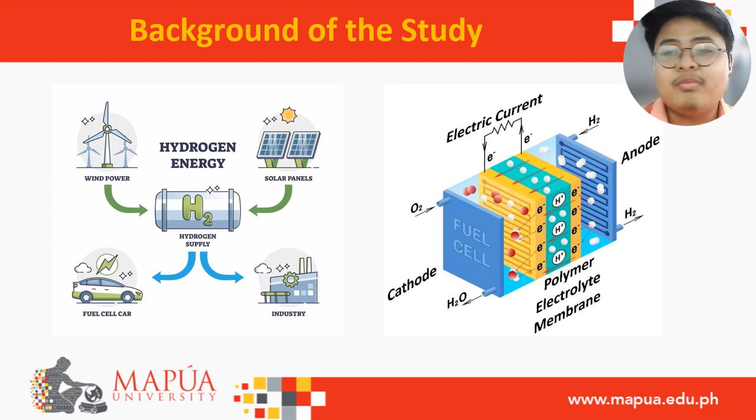It operates on the principle of having a redox reaction between oxygen and hydrogen to form water, heat, as well as electricity. At the heart of a PEMFC is the polymer electrolyte membrane or PEM. This membrane allows for the proper functioning of the whole fuel cell.

Studies have shown that there are different factors that could affect the performance of a PEMFC. This includes temperature, moisture, and microstructure. In this study, we will be focusing on the microstructure of the membrane and how it affects performance.

Furthermore, studies have determined ideal qualities for a PEM. This includes good ionic conductivity, the membrane being an electric insulator, it being impervious to gas, mechanically stable, and chemically stable. In this study, we'll be focusing on its ionic conductivity as well as how the membrane should be impervious to gas.

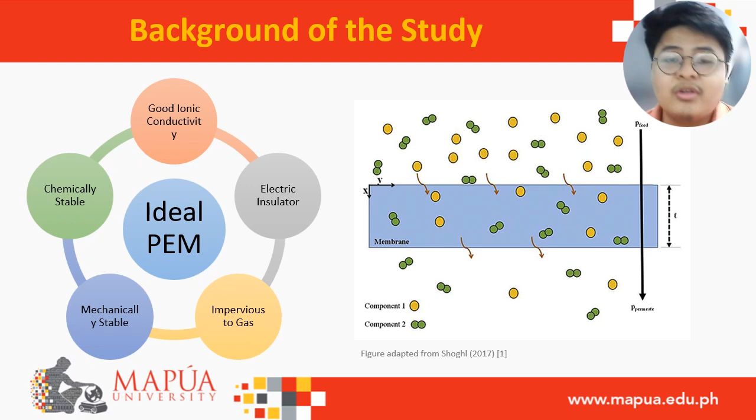Now, while the ideal PEM should be impervious to gas, in practice, gases do indeed penetrate through the membrane as shown in the figure on the right. We can see here that different components of gases are able to penetrate through the membrane.

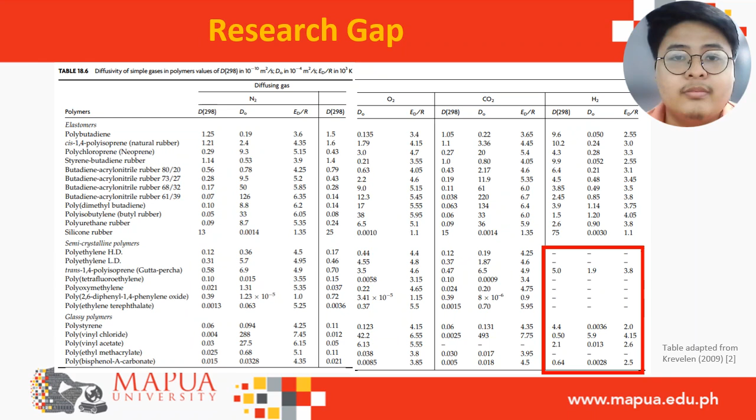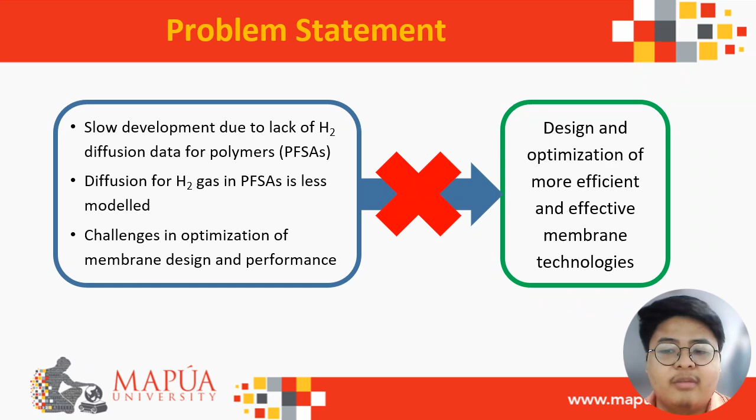The development of advanced membrane technologies is hindered by the scarcity of reliable diffusion data for polymers, particularly for gas-polymer interactions. This lack of information impedes the optimization of membrane design and performance, leading to inefficient and costly membrane development processes. To overcome these challenges, comprehensive diffusion data for polymers are needed to improve the understanding of gas diffusion in membranes, enabling the design and optimization of more efficient and effective membrane technologies.

To address these challenges, this study aimed to investigate the hydrogen penetration and diffusion into Flemion based on the penetration ratio of hydrogen in Flemion with varying side chain lengths via molecular dynamic simulations, as well as to decipher the mechanistic behavior of hydrogen gas into Flemion based on molecular interactions, also with varying Flemion polymer side chain length. Lastly, this study aimed to investigate the hydronium diffusion and conductivity in Flemion by varying Flemion polymer side chain lengths via molecular dynamic simulations.

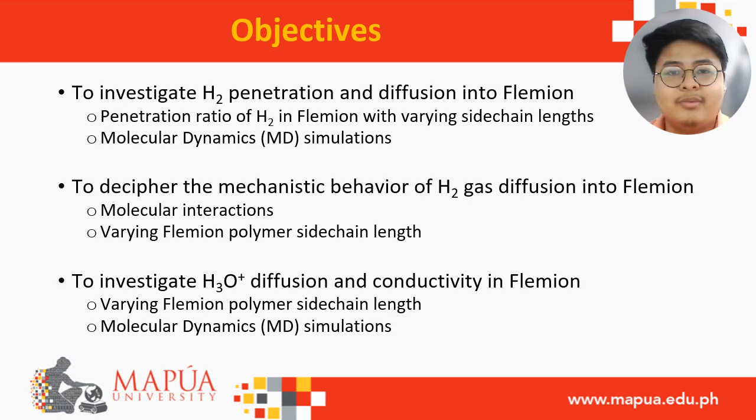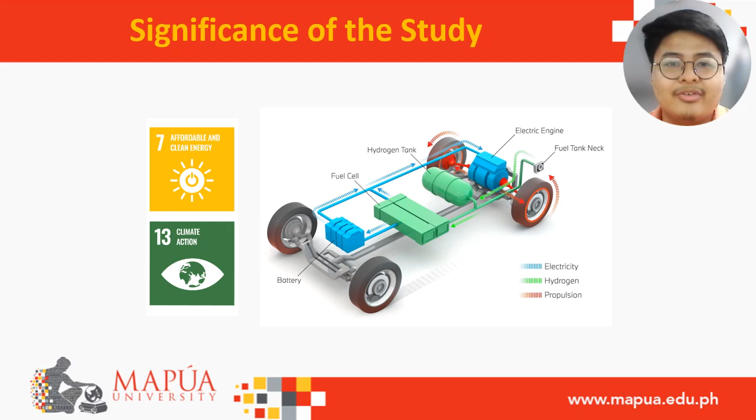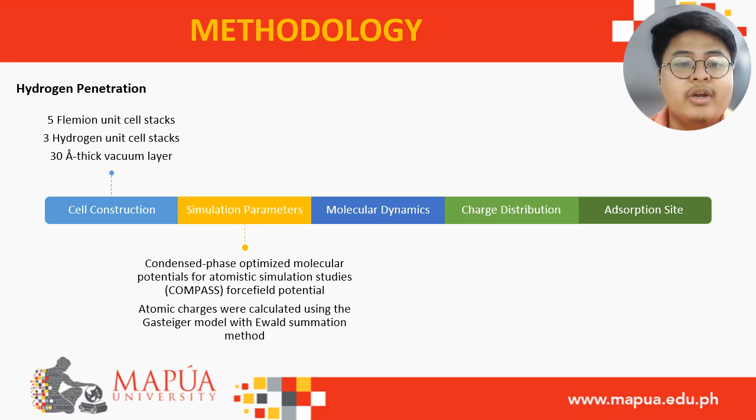For hydrogen penetration, this part of the methodology is based off of Chas' developed method on evaluating gas penetration into membranes using molecular dynamic simulations. For cell construction, our cell comprised 5 Flemion unit cell stacks, 3 hydrogen unit cell stacks, as well as a 30 angstrom thick vacuum layer. For the simulation parameters, we made use of a COMPASS force field potential, where the atomic charges were calculated using the Gasteiger model with the Ewald summation method.

For the molecular dynamics, we made use of a constant temperature molecular dynamics, with the Nose-Hoover Langevin thermostat, performed at a constant 298 Kelvin with a time step of 1 femtosecond for a total simulation time of 0.2 nanoseconds per run.

For the charge distribution, we made use of the DFT, PBE, GGA, DNP under the DMol3 module. Here, we were able to evaluate the molecular binding energies of hydrogen to the side chain. Lastly, for adsorption site, a maximum adsorption distance of 3.5 angstroms was set.

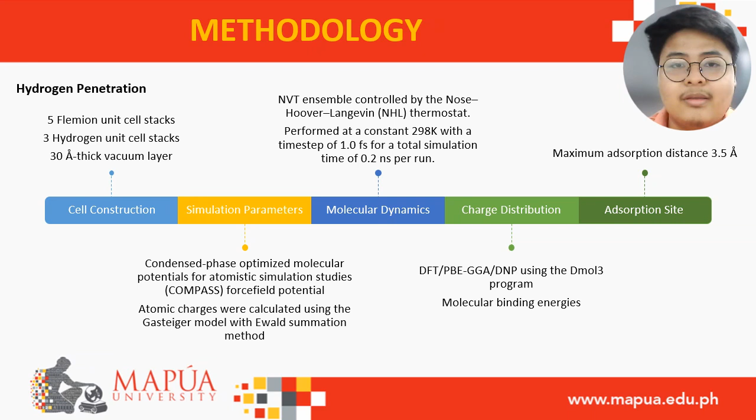For the hydrogen and hydronium diffusion, this methodology was based off of Muir's study on the evaluation of gas diffusion in membranes using molecular dynamic simulations. Similarly, for cell construction, we made use of one Flemion polymer, 20 water molecules, 10 hydronium ions, and hydrogen molecules were added incrementally with loading values of 1, 2, 4, 16, 128, and 256.

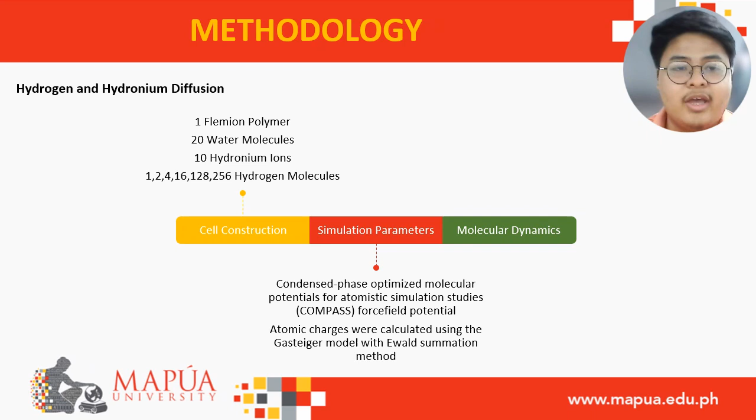For simulation parameters, we made use of the same parameters as previously stated, the COMPASS force field potential with the Gasteiger model and Ewald summation method. For molecular dynamics, it was the same. However, this time the total simulation time was just 0.1 nanoseconds.

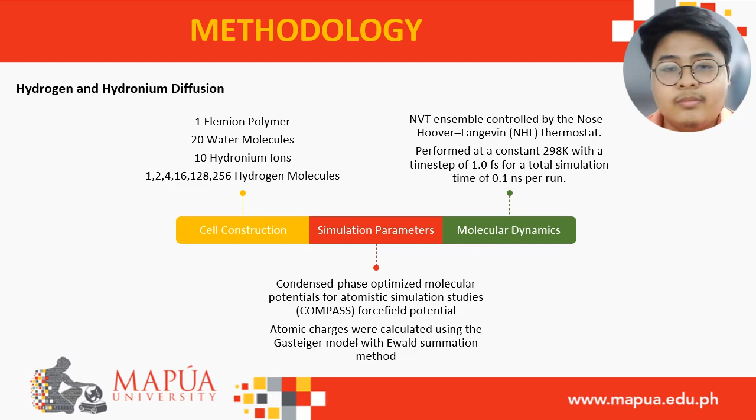To start off, we first validated the structure of Flemion. Here on the figure on the top right, we can see the structural similarities between Nafion and Flemion, with the only differences being its side chain lengths, but they both have the same chemical constituents. Here in figure 1, we see XRD patterns for PWA Nafion composites. What is important to us here is the XRD pattern at the bottom for Nafion 117.

Here in figure 2, this is our calculated XRD patterns for Flemion. We can see a distinct similarity between Nafion and Flemion, with identifying peaks at the following 2 theta degrees: a weak broad peak at approximately 40 degrees, a strong broad peak at approximately 15 degrees, and a strong sharp peak at approximately 17.5 degrees. This tells us that the structure drawn is very similar to Nafion.

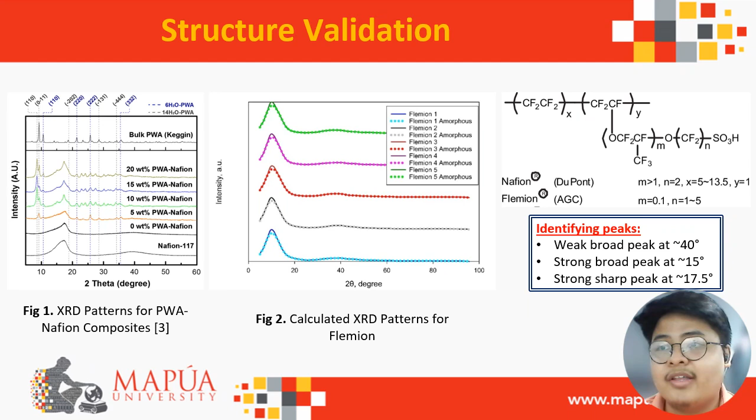With the validated structures, we determine the hydrogen penetration. Here in figure 3a, we can see that hydrogen penetration ratio decreased by 11.53% from Flemion 1 to 5, where the penetration ratio is defined as the penetration depth over the membrane length. This suggests that longer side chain lengths decrease the penetration, meaning that hydrogen is not able to penetrate as deep with longer side chains as they act as an obstruction.

This is further supported by the radius of gyration here in figure 3b, where we can see that the radius of gyration increases with increase in mass due to increasing side chain length. Now, in this context, the radius of gyration is defined as a distribution of the side chain of a polymer around its center of mass. Due to the aggregation of the hydrophobic backbones of Flemion, the side chain is able to move, which explains the higher radius of gyration for the longer side chains.

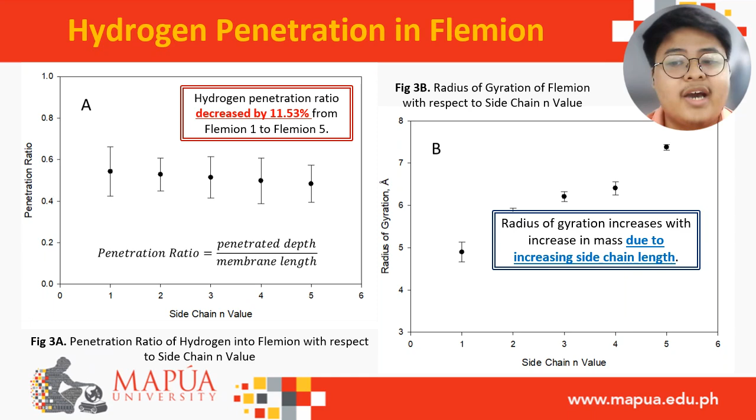When modeling MSD-based diffusion, it is important to determine if the diffusion being modeled is under the normal diffusion regime and not an anomalous diffusion. The normal diffusion regime is described by the following power law, where the mean square displacement should be directly proportional to the time raised to n, where n is equal to 1.

Here in figure 4, we can see that since simulations on all polymer systems produce plots with slope approximately unity, diffusion is within the normal diffusion regime. This suggests that the hydrogen molecules follow a truly Einstein behavior, which means that the diffusion that was modeled was not anomalous, but rather it was truly random.

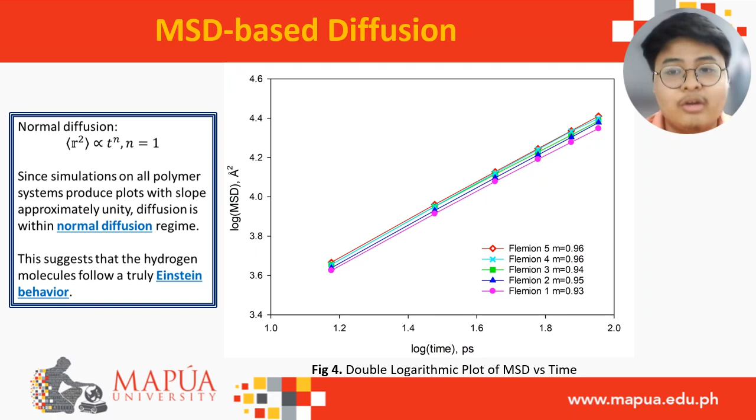In relation to polymer morphology, we have determined the hydrogen diffusion coefficients. This is seen in figure 5b, where we can see that longer side chains lead to lower hydrogen diffusivity. Now, in order to better understand this, we also calculated the free volume, which is seen here in figure 5a, where the decreasing trend suggests that there is physically less space for hydrogen to diffuse through.

The lower free volume relative to the unit cell volume suggests that there is physically less space for hydrogen to diffuse through. This means that a low percent free volume translates to less hydrogen diffusion, which reflects in hydrogen having low diffusivity coefficients in Flemion as summarized in figure 5b.

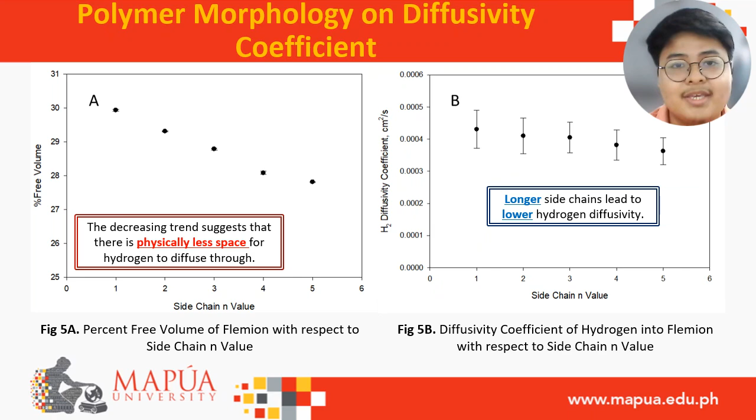To validate our results, we applied the same methodology to Nafion to serve as a comparison, as there is a lack of data available for Flemion for direct comparison. What we have determined from the literature is that there is a wide range of hydrogen diffusivity coefficients available for Nafion. Using the same molecular dynamics methods applied on Nafion, the calculated MSD-based diffusivity coefficient is within literature range.

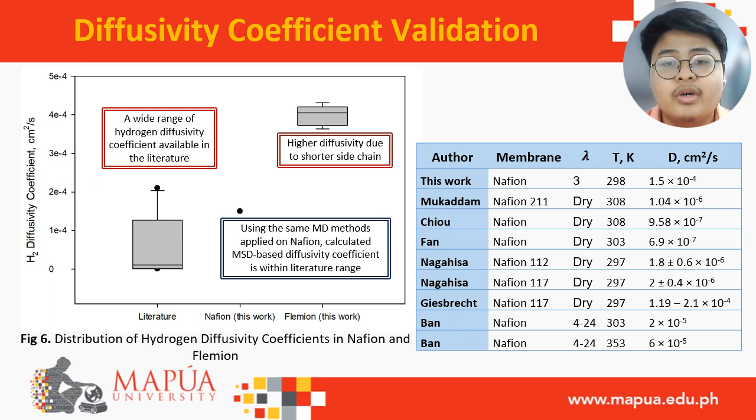Now, relative to the hydrogen diffusivity coefficients of Flemion, we have attributed this to the higher diffusivity due to it having shorter side chains. In order to determine the mechanistic behavior of hydrogen in Flemion, we calculated the adsorption energies as well as adsorption distances for hydrogen in Flemion, and we have determined that the possible adsorption sites for hydrogen in Flemion are all near the sulfonate groups as well as the oxygen groups, seen here in figure 7.

Here in table 1, we can see that hydrogen has minimal interaction with Flemion, with their binding energies being nearly zero. This means that induced dipole and van der Waals are not strong enough for the side chains to be considered as carriers, since for a facilitated transport diffusion, a carrier is necessary. Therefore, our proposed diffusion mechanism for hydrogen in Flemion is analogous to the interstitial diffusion mechanism, wherein the hydrogen is able to diffuse through the polymer matrix due to the small interstices present in the polymer matrix.

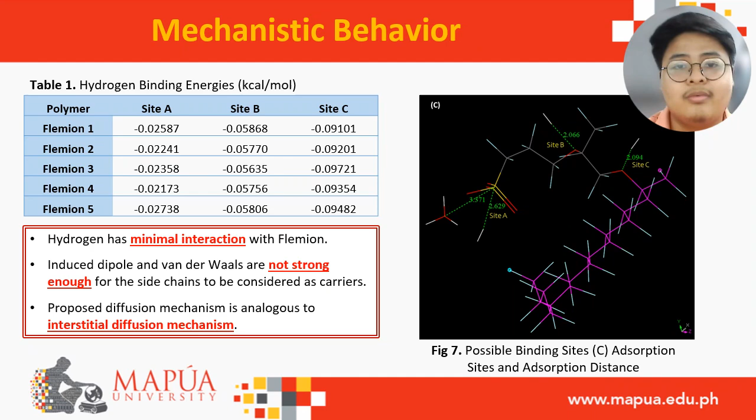Here, in the free volume analysis, we will be able to understand what the aqueous and polymer domains are. In figure 9, this is the solvent volume isosurfaces, wherein the blue figures represent the aqueous domain. Here in table 2, we have the surface area, free volume, as well as its ratio. And we can see that the surface area to free volume ratio of the aqueous domains increases with increasing side chain length. This suggests that the volume occupied by the aqueous domain decreases. The observed behavior is due to the formation of small water clusters and possible elongation of channels, effectively decreasing hydronium ion conductivity as well as diffusivity.

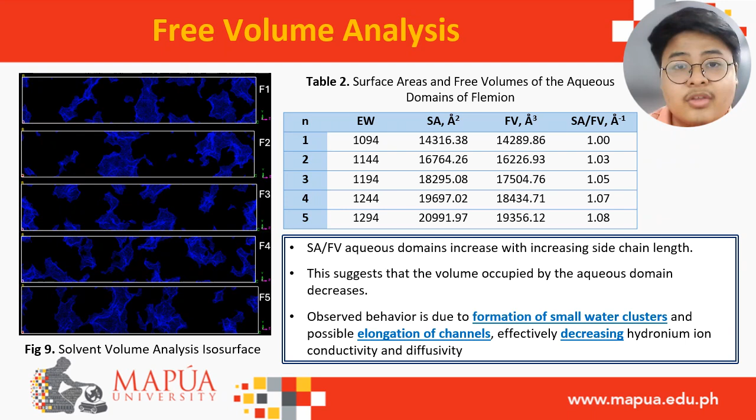For validation, we also applied our methodology to Nafion, and we found that the calculated ionic conductivity for Nafion, following the same molecular dynamics methods, shows good agreement with available data in literature. This suggests that the methodology used for calculating the ionic conductivity in Flemion follows that of those for Nafion.

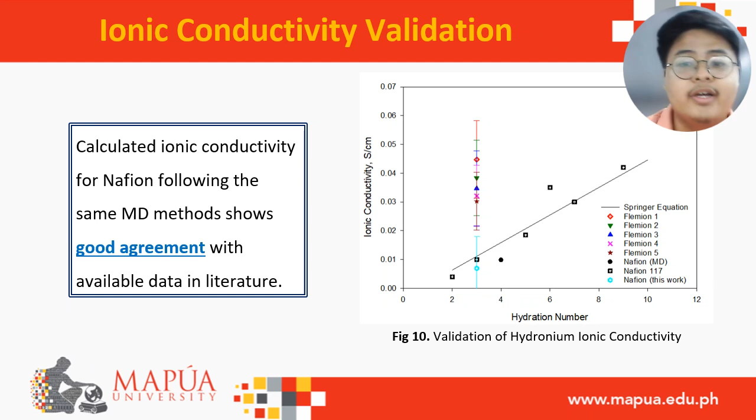All in all, we have determined that a decrease in hydrogen penetration was observed with increasing Flemion side chain length due to the decrease in system percent free volume. Furthermore, the diffusivity coefficients of hydrogen and the hydronium ion in Flemion with respect to side chain length were successfully evaluated. The results of the study support the notion that hydrogen penetrates Flemion through a mechanism analogous to the interstitial diffusion mechanism. A similar decrease in ionic conductivity was observed with an increase in side chain length due to the formation of smaller aqueous domains crucial for proton conduction.

For future studies, further studies need to be performed to determine an optimal side chain length that will afford minimal hydrogen gas crossover without sacrificing ionic conductivity. Furthermore, elevated temperatures can be considered as another factor for modeling hydrogen diffusion. Also, more advanced modeling of proton conduction, including the Grotthuss component of proton diffusion, can be performed. Lastly, experimental methods may be applied to determine the accuracy of the model employed in the computations.